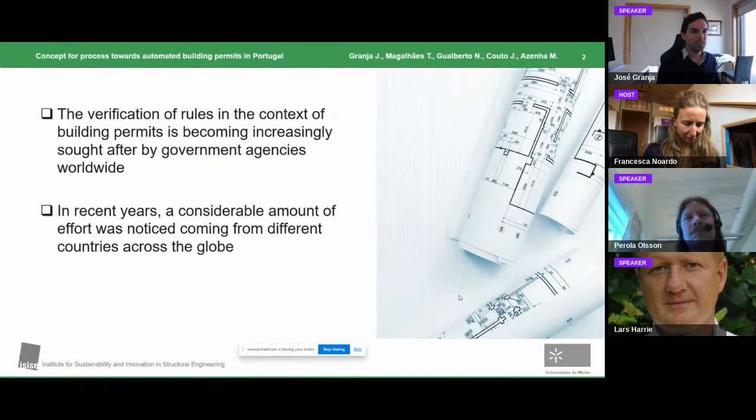As we already spoke a lot about this, there is a very big interest worldwide for the automation of building permits, and in recent years, a lot has been done, especially with the open source formats that are enabling the push towards more automated digital building permits.

However, in Portugal, some years ago there were no efforts yet. We were still in the transition from paper to digital formats, even in the traditional drawings for the building permits. There are still municipalities in that transition, and there is no full transition from paper to digital. But now we wanted to evaluate the possibility to push to fully automated digital building permits.

So the first approach that we performed was a case study some years ago, where we looked at one of the national regulations, that I will be speaking about a little bit after, to check how we can put automatic verifications from this regulation. The first approach was to use Solibri Model Checker. Later we thought that this is not a good approach, but this was the first approach. And we had a case study of a small house in the municipality of Vila Nova de Gaia.

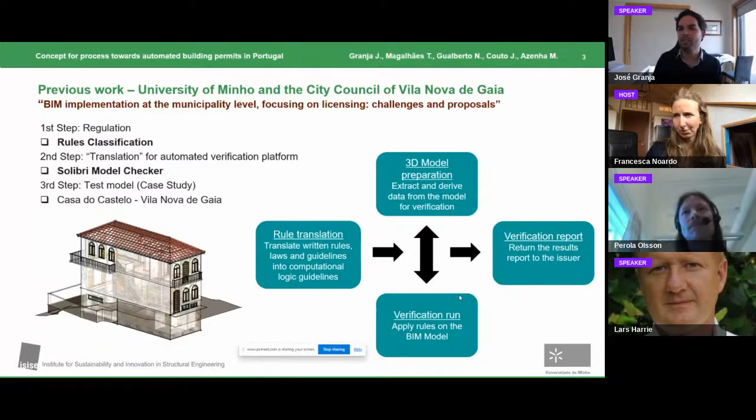So first, we looked at our national code, the general regulation for urban buildings. And we went through all the regulation to check what articles could be automatically verified or not. It means, is there a way to program the rule in simple programming, not going to artificial intelligence, because we have a lot of rules that are not yes or no. It's very gray, and it needs a human to interpret the rule.

So we went through all the articles, and we found that more or less half of the articles we were able to implement in an automatic verification, even if just in some parts, because some others might need a human hand to fully verify that regulation. And from the overall articles, we found that we had 140 rules to verify.

Then we picked those rules and went to Solibri Model Checker, and we checked how many of them we could implement without going to the programming inside Solibri, to see what could be done with the already available tool. And we found that from these 140, only 55 could be implemented directly in Solibri Model Checker from this regulation.

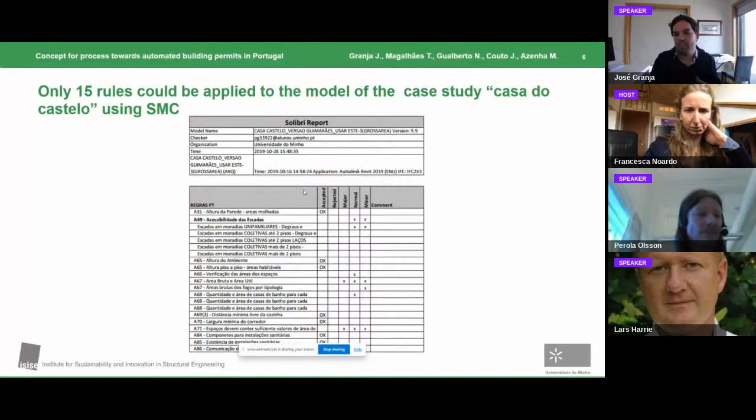And then we took this implementation in Solibri Model Checker to the case study and ran it, and only 15 rules from these 55 applied to that case study, because this was a small building, and that regulation is very general. It's for all types of buildings, and this was just a small house. There were a lot of articles not included because there was no meaning to verify them.

But then we were very excited, even if it was a preliminary study. And then we started thinking about how we should go further on this, and that we should look at the entire set of rules. For example, in the Gaia municipality, we have 3 more rules that are not national but at the municipal level. You have the municipal regulation for urbanization and buildings, the municipality master plan, and also more specific rules for some neighborhoods.

And we wanted to go for a more open source solution and to implement algorithm-based verifications as in Solibri, but in a more open source way. We had some experience working with BIM Vision. It's not completely open source, but it enables us to implement coding in the API.

So our approach was to go to a completely open source file with the IFC, and we wanted to implement some rules, some modeling rules for designers, with the minimum impact on their workflows, but for us to be able to automatically run verifications.

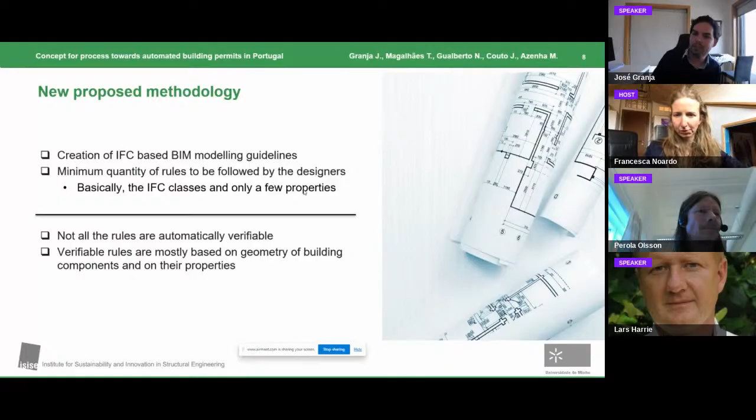Of course, we know that there were some rules that were not possible to go for verification with the current regulations, and this is an issue in Portugal, and we are working on it to see what we can do with that kind of regulations, which we might be able to change or not. But despite the fact, we went through the next step.

So we went to BIM Vision. We started implementing some plugins with coding in C#. For example, in here it was for an article for verifying the typology of each fraction inside a building, and this was relatively easy to implement because the rule was very specific, and we went through.

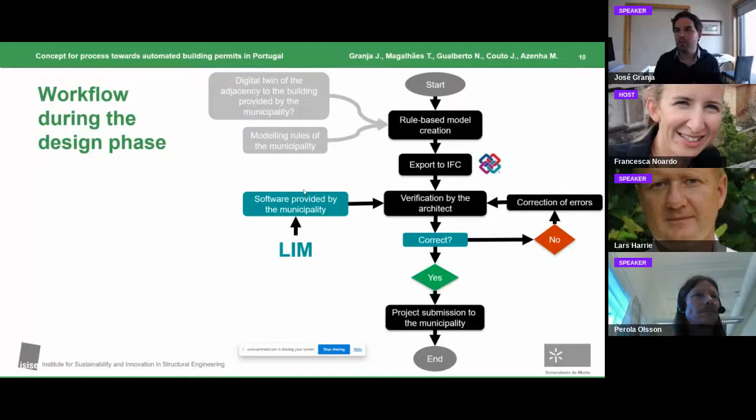And then also we set some workflows for the overall approach of the digital building permits. We had 2 different workflows, one for the designers and one for the side of the municipality. And this was our thinking of how this should work.

So from the designer, we wanted for him to receive from the municipality all the modeling rules, and also, if possible, to deliver the digital twin of the neighborhood of the building for him to be able to perform the design based on the rules, and to export to the open format, the IFC format, and to check automatically if this IFC has some problems already or not, or if it's completely correct for submission to the digital building permit.

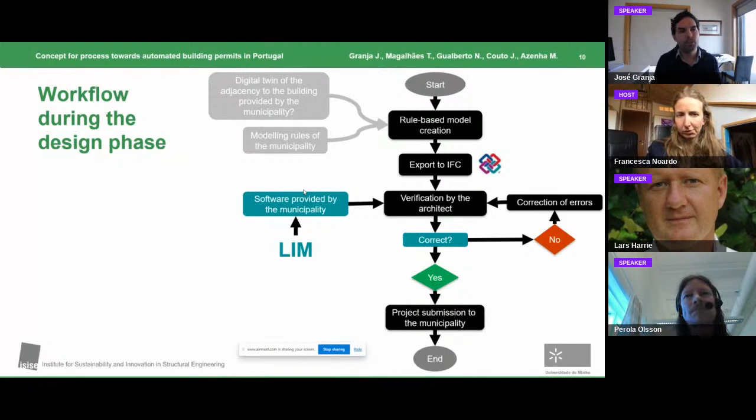So then, from the side of the municipality, after that verification, the municipality will receive a more proficient IFC, and it will run a semi-automatic check. We will not call it fully automatic, because in our opinion, it should be a semi-automatic rule checking, because in the end, the results will always be checked by a person, for all the rules that are not automatic, or even to check, even in the automatic verifications, if this is compliant with the philosophy of the municipality.

And of course, if this is okay, the project will be approved. If it's not, a report based on a BCF format will be sent back to the designer for him to correct the problems with the design.

We went again through all the codes, and we started to classify all the rules and to check what different types or methods of verification we need to use. And until now, we already came out with some types of methods. Here is a sample of them.

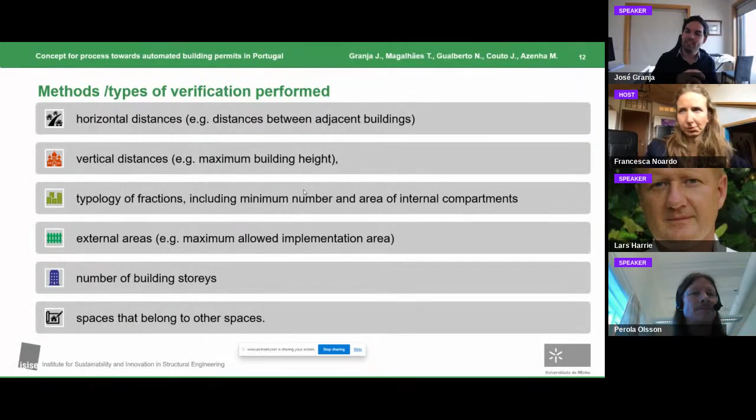For example, in terms of verifying distance, horizontal, vertical, in terms of verifying typologies or verifying spaces and properties of spaces, verifying the number of stories and story heights and so on. And of course, if we have spaces inside other spaces, to make some kind of verifications with that method.

Then we went through all the codes and we checked what is the rule that we need to verify and how we should implement this rule in terms of those simple methods and types of verifications. And we were able, in a not very complicated way, to check a lot of different rules, not the entire set, but some of them, with a very low impact on changing the way designers model their own buildings. And then we implemented all of this inside BIM Vision.

We implemented some articles from the regulations in Portugal. But in the end, despite the fact that we were very successful, and we presented this already to 2 municipalities in Portugal, we found out that probably we should not be using BIM Vision. We are now changing to a completely open format, because even if we could do this freely in an academic approach, if we go to the municipality part, we need to switch to a completely open format. And this is the point where we are.

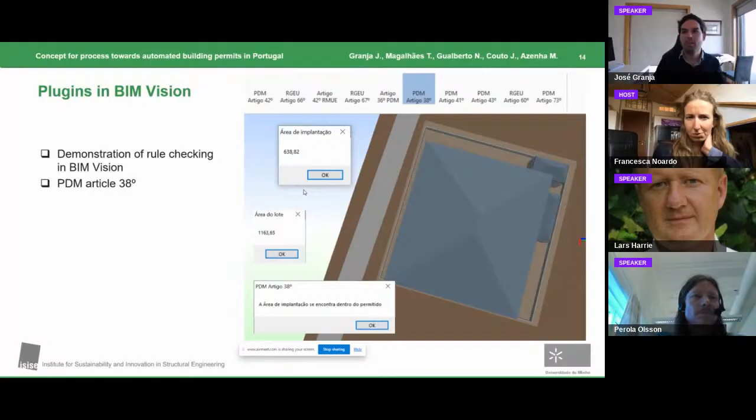We are now going fully open source, and we believe, as Tonya presented, that this should also go online, to an online platform, not only being in a standalone application.

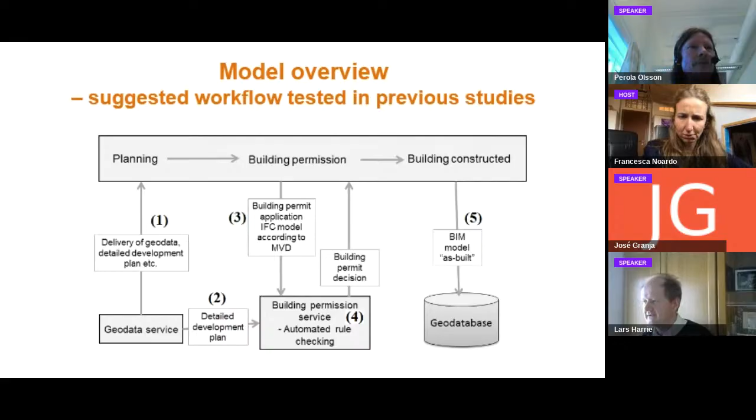Yeah. So what have we done thus far? What is currently happening in Sweden? So one project we have been involved with, a project where we studied the possibility to create an unbroken digital data flow in the built environment process, following the workflow in the previous slide.

There, as I mentioned, the first step is to import the geodata and the detailed development plan in IFC format to a BIM environment. And that proved to be quite tricky because the BIM environments we tested were sensitive to geometries. And there were a lot of point and line objects in the geodata that were not well handled by the BIM tools. And there is currently ongoing work to develop a national specification for geodata that's led by Lantmäteriet, which is the Swedish Mapping, Cadastral and Land Registration Authority.

And the aim is to have a national standard for geodata, so that data that are delivered from the geodata service is in the same format, no matter what municipality the data is obtained from. That will make it easier to convert the geodata to IFC format.

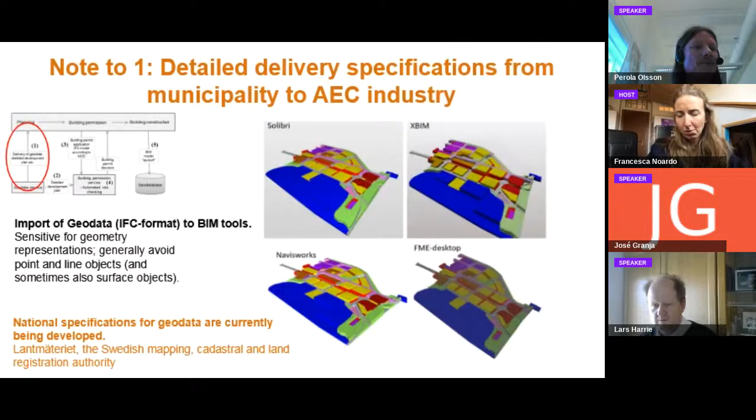When it comes to the detailed development plan, there is a recent digital standard. It was established in 2016 to support machine-readable development plans. The standard defines which building regulation types are allowed in the plan, but it's not easy to translate already existing detailed development plans to the new standard.

But we did an inventory of the rules and regulations in the new digital standard. We estimated that around 85% of the regulations will be possible to check with automated methods if we have BIM and geodata available. And there is new legislation that from 2022, all new detailed development plans must follow the new digital standards, which means it will be easier to automate the code checking.

There's also ongoing work to develop guidelines for information content in BIM to support automated compliance checks based on BIM models. So IFC is, as you know, a very flexible standard. And the plan is to define a model view definition that states what objects and what information are required in the BIM model that is used when applying for a building permit.

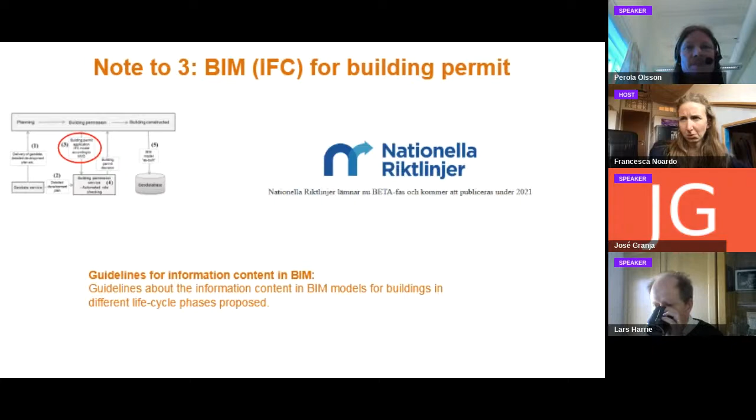And we have done some tests with automated rule checking, or rather semi-automated rule checking. And we have used IFC models, geodata, and detailed development plans according to the new digital standards. And we have checked rather simple regulations related to geometry, such as building area, building heights, if the building is in an allowed location, and if there are enough available parking spaces, etc.

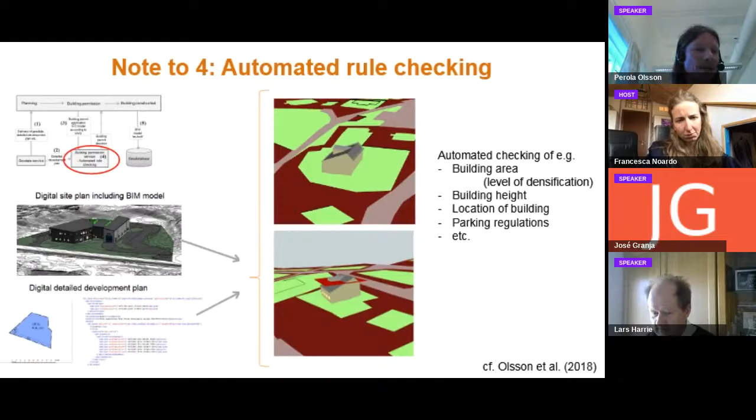And we have done all tests in FME, where we import the data, we perform the tests and generate a simple report in Excel format and also visualize in FME. So on the center part of this slide, you see a test where we tested building height. At the top, the building is within regulations, so it's okay to build. The bottom building is too high, so we get a red warning and the red plane that shows the maximum allowed height of the building.

Then the final step in the workflow is to update the geodatabase with the as-built IFC model. And again, there are guidelines for information content in BIM, and there will be guidelines also to state which information and objects are required in the as-built IFC model to update the geodatabase.

In the ongoing work to develop national specifications for geodata, as I mentioned, one part is about buildings. So there will be a national information model for buildings. That's also developed by Lantmäteriet. And we are also involved in a project together with the 3 largest cities in Sweden that hopefully will be the base for a national standard for 3D city models. The work we're doing is based on CityGML, and we're working with information modeling and measuring and modeling guidelines.

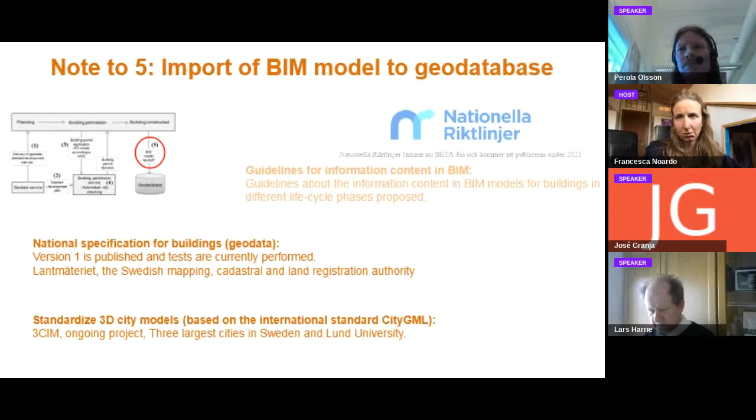And we have done some tests to update geodatabases with IFC models. We converted IFC models for different buildings to 3D geodata in CityGML format, and we compared it with 3D building models that were created from LiDAR data. And the geometries of both building models, the one from IFC and the one from LiDAR, agree well.

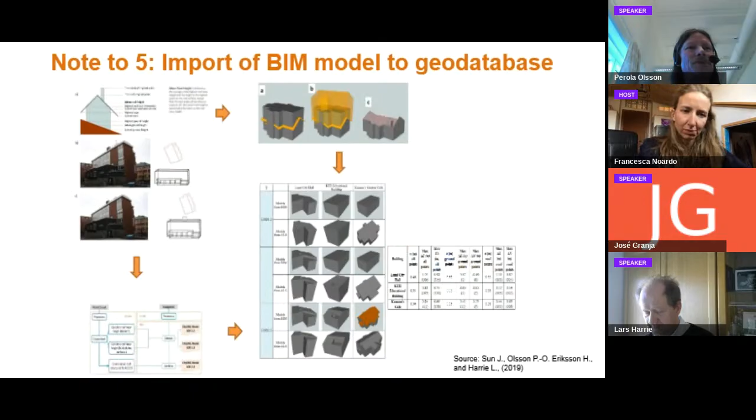One important finding in the study is that modeling guidelines are really important when we want to convert the IFC models to geodata format, because there's so much information in the IFC model. So what should we expect? How large should objects be to be included in the geodata model? Yeah, that's all for this presentation.